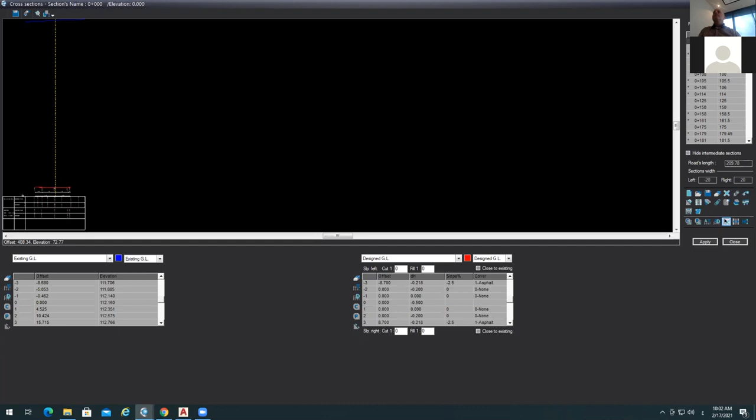Yeah, okay, you are working with DH. It's okay. Go to the vertical alignment and see what's going on. Close this and go to the vertical alignment. Yeah.

Where's your design? I made the design by cross sections, right? No, first of all you design the profile, and then you design the cross section using the template. Oh yeah, I should. Okay. There's no profile here, there's nothing. Yeah, okay, I know the problem. Thank you, okay, that's no problem.

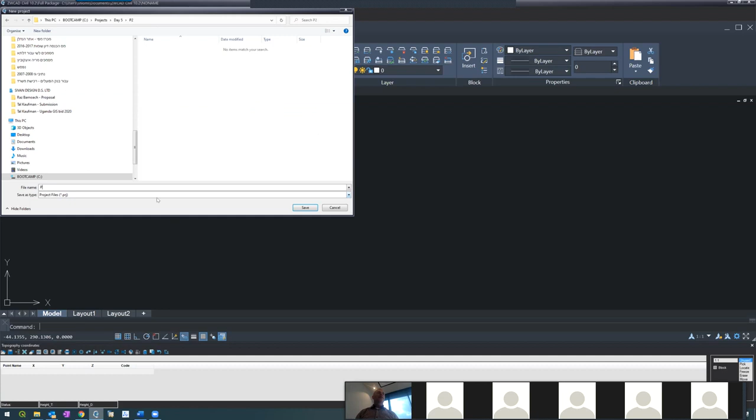File, new project. No, I will go to documents and go to - sorry, I'll put it in my C. In projects, I open a folder named day 5. I will open another, I'll call it practice 2, and the name of the project, P2, like we did in the first place. I started a new project.

The next thing, load the coordinates file. I'm loading a coordinates file for my samples. I go to the documents - all of you have it. I'll go to ZWCAD, samples, bridge, junction, and design. Looking for the TCO - TCO is the topography coordinates file, it's a TXT file, you can see it here. And I will refresh.

And we'll see the coordinates. Now, next thing, topography contours. I will use 0.25. Maximum interpolation length, not so important. I will do 100 and apply.

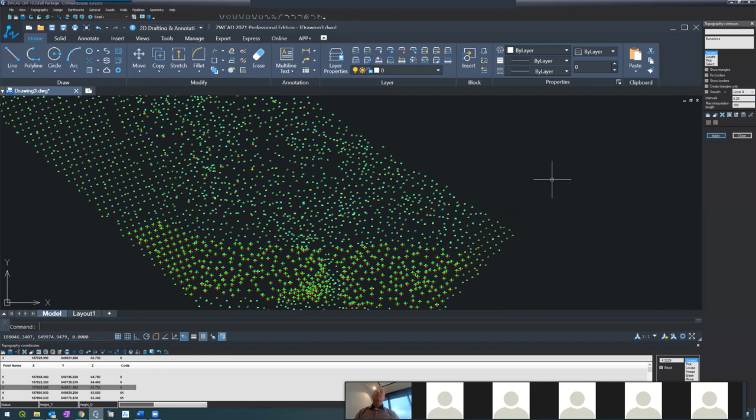Okay, fine, we are good. Good to go. Here it is.

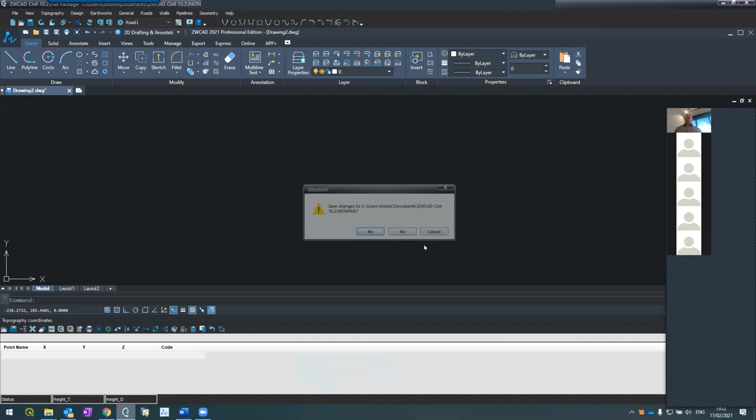Okay, so I started with a project which I did. I called it P2, and I've loaded to, I created the surface of the ground level.

Now I can go to the layers. I can take civil, make it like this, and all my topography contours layers, I'll make them dark, so they will be in the background. Good, it's better for me this way.

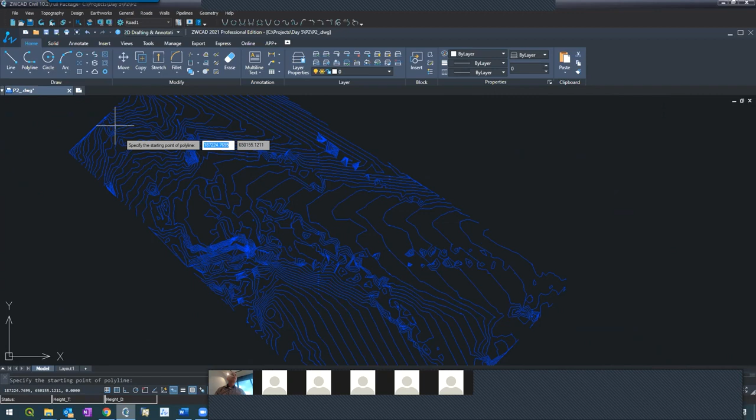Okay, now I want to design my road, so I'll create a polyline that starts somewhere here. Go along this, I don't know what to call it. And here, along this small, it's not even a cliff, I don't know what it is.

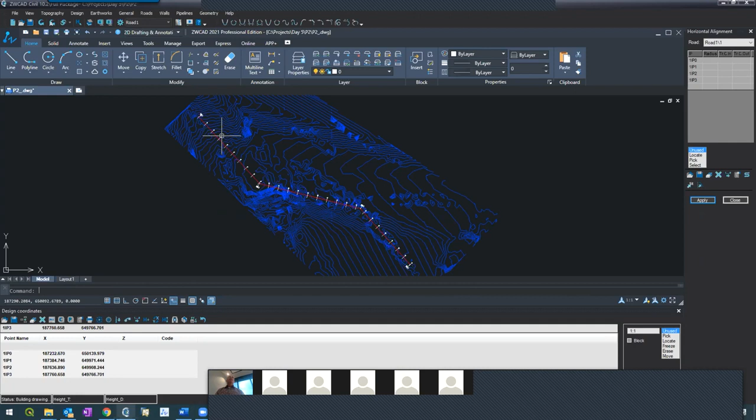Anyhow, roads, horizontal alignment, select, enter, select. Apply, and this is my road, so I will change the appearance to be format 2.

And I will enter a radius here of 300, 500. Right, let's see. Yeah. Okay.

This is what I've designed. Fine, the next step, vertical alignment, applied, and got the existing ground level.

Now I want to show you a trick. If I click here on the right, get ground level at offset, I want to get the ground level at an offset from the center line. I want to know what goes in terms of ground level. Let's say my road will be more or less 10 meters to the left. No, let's say 3.5 plus 1.5, 5. I want to know what's going on 5 meters to the left and 5 meters to the right from my center line. I apply this, and the software will give me how the ground level behaves 5 meters to the left and right from the center line.

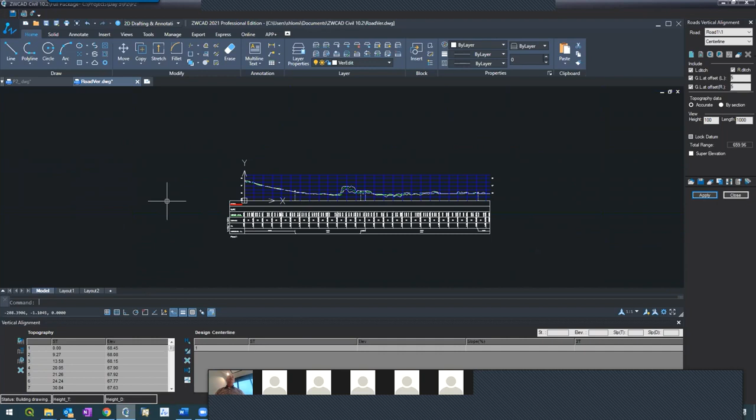I hope you understand. So from the center line, let's see. I told it, go 5 meters to the right, 5 meters to the left, and also give me the ground level, especially here where we see the change. So again, if I go to the vertical alignment, this is what I'm seeing here. Good.

Okay, this is my profile. Now I'll continue with my designs. So what I'm gonna do, 1 minute, I'm trying to minimize this.

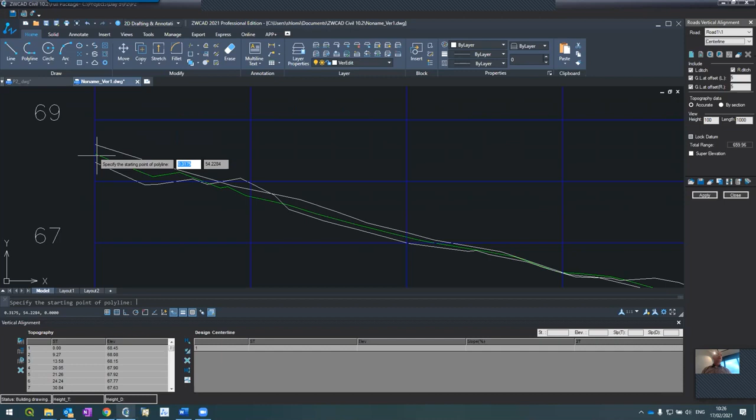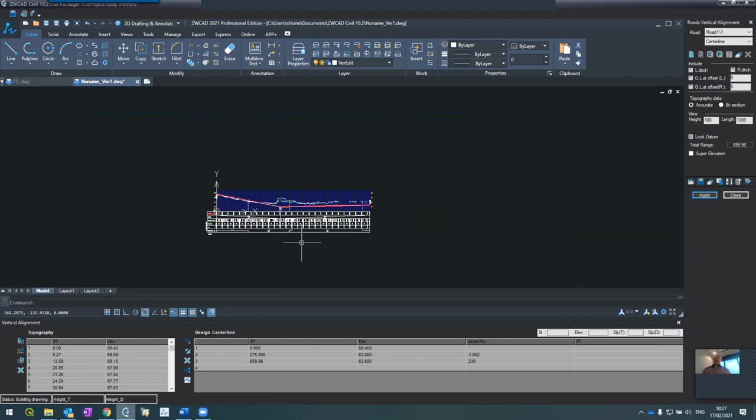Okay, what I'm gonna do now is making my design. I will start with the ground level, polyline from, let's say, here. And here, I want to cut a little bit. This is 1 meter each one, so 2, let's say, like this, 3 meters. And from here, like this. Okay, so this is my design. Here I'll enter 275 meters.

Excellent, any questions so far? I think we know already this one, but if you have any question, this is the time. Anything about the things that I've shown? Nothing. All clear, Majid, is it okay?

Majid, can you follow? Yes, it's okay, it's okay. What about the rest? Gal, everything is clear? Yes, okay.

I want to continue, all right. So this is what I've done. I will now go. Sorry, okay, apply. There's no need to apply it all because there are no cross sections.

I'll go to the roads cross sections, and I'll use the same trick, define sections, 25 meter, get the sections.

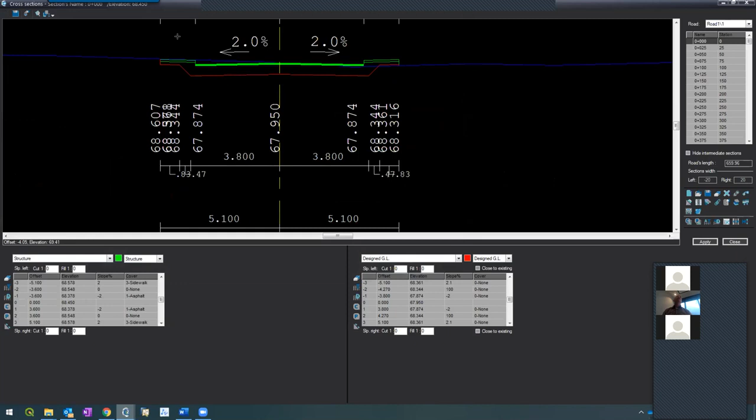Copy it, go to the last section, paste, apply. Interpolate, all design. Fine, I have all my sections.

Ah, okay, it's my mistake. I'm not using DH. DH, this is what was missing. Let me clear again. The problem I had was not using DH, so I'm clearing the sections. Very important that in the options you'll use DH, not elevation.

Now I'm going to the first section, read the template. Okay, now it makes more sense to me. Go to the last, paste, and interpolate.

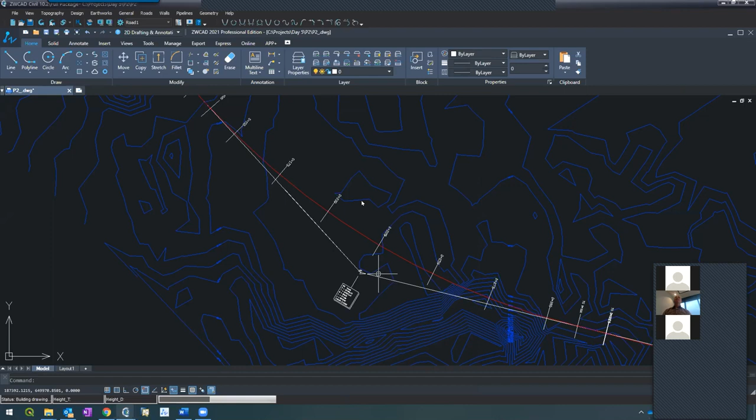We know that here we are cutting. Remember the profile. And I will create the layout. I want to see the contours, the distance.

Here there's a cut of 2 meters. 2 meters. 1 point something meter, it's okay, it's fine by me. Okay, so this is my profile, this is my layout.

What I want you to do is go to the practice I sent you, and all of you come to the same situation like I did. I want you to design your road using the practice and reach that level. Take 10 minutes, if you have questions let me know. In 10 minutes we will continue with defining a drainage pipeline along this road. Meanwhile, practice this one.

One more thing for your practice, let me just finish super elevation. I'm pressing here, super elevation. This is, let's say, 70 kilometers per hour. The lane is 3.8 meters, I see, and the side slope is 2%, okay?

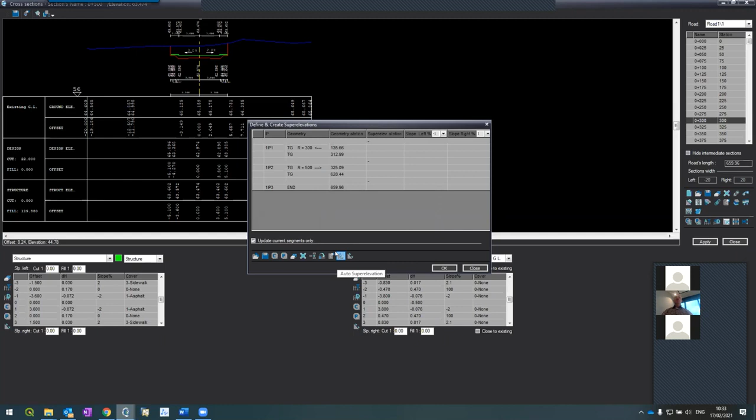He said he cannot do the super elevation because these two are too close. Let's make it 50. Transition is too close. The sector says the transition between here and here is too close, it cannot create super elevation. See, the transition is very close actually.

Okay, now we'll see. This is the transition. You know what I'll do? I'll go to the horizontal alignment and use this move here to take this IP and move it from here to here, say here. Let's apply.

Okay, now I've created an overlap on the IPs. So let me take this to be 300 meters for this curve. Now I don't think we will have problems. Let's see, okay, the transition is, the TG is here, yes, about 100 meters between them.

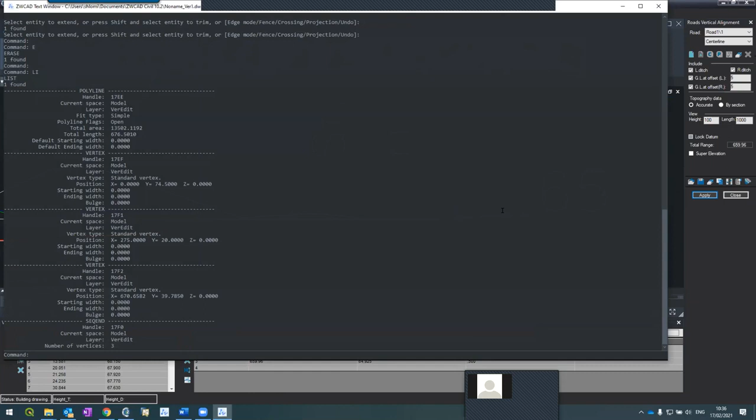This, VerEdit. Ah okay, now it's corrected. No, still on the back. You know what, I'll do it in the table here. The total length is 676. Ah okay, no, sorry, the existing end here. The total range 659, okay, no it's okay.

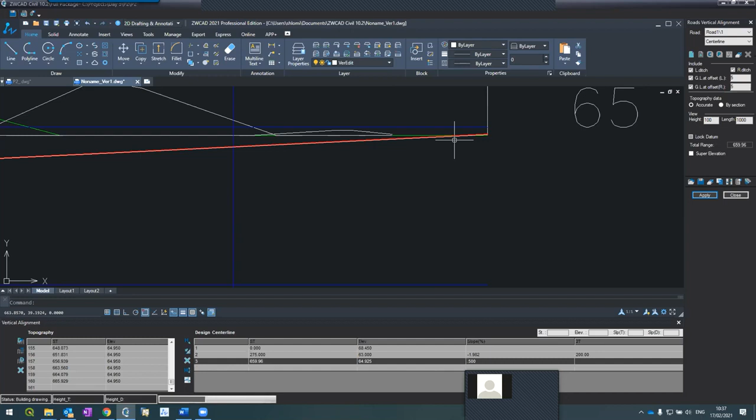What I did is designing too much. Let me change it a little bit. Ah, yeah, it's 665, so I change it to be 665.299. I see the ground level and go again at the same slope, 0.5. Let's see if it's working. Yeah, now it's okay, that's what I wanted to do.

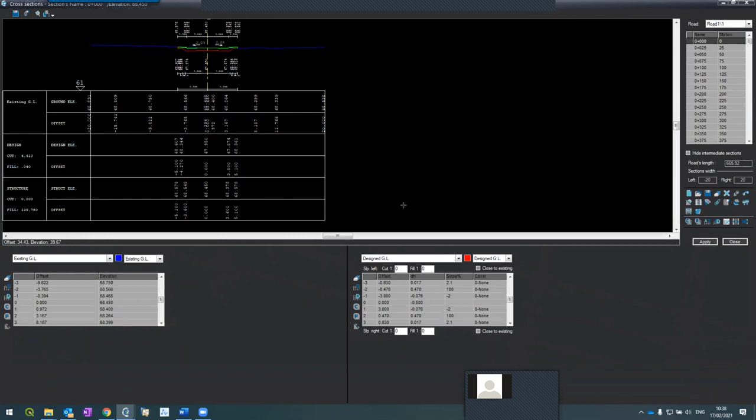And I'll apply, update all, so all my cross sections will be rebuilt. Go to the cross sections, let's have a look. Yeah, everything was rebuilt. I can update the layout.

So what I'm asking all of you is to design a road similar to what I did, like this. And when you finish, create super elevations here. I'm using automatic 70, yeah, like this.

No, distance too small again. So let's make it, okay, now it's okay. The speed is lower, it's okay. Now, let's see the super elevation. Okay, we see it here.

Great, so all of you take 10 minutes and do the same. I'm waiting for you. You have the practice? Anyone doesn't have a practice? Is anyone missing the practice? No, okay, I sent it by mail so all of you are supposed to have it.

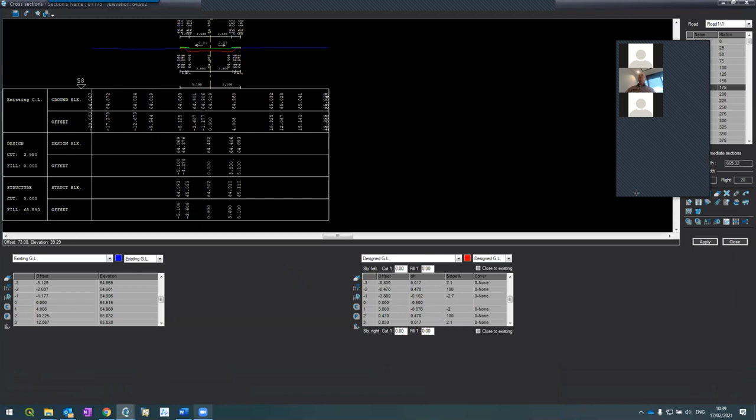Okay, take your time to practice, 10 minutes, get to the same position where I've been, and ensure you have a road similar to this one. I'm waiting, I'm here. Take exactly 10 minutes so we can continue and try to build something similar to this one.

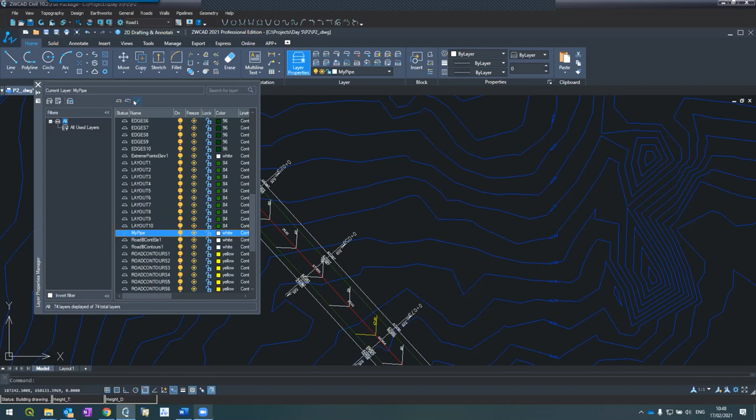The first stage is to open a new layer, and this layer I will call pipe - it can be any name. Let me change it to 'my pipe.' I will make it the current layer and give it a color, something like this.

And what I'll do to the road itself, I'll make it somehow this color. Also to the contours of the road, I will make them this color.

Okay, now I'm designing my pipeline. So the first manhole starts somewhere in the road here. Continue, let's say - actually I can go 50 meters, let's say 50 meters to this direction. 50 meters, and another 50 meters.

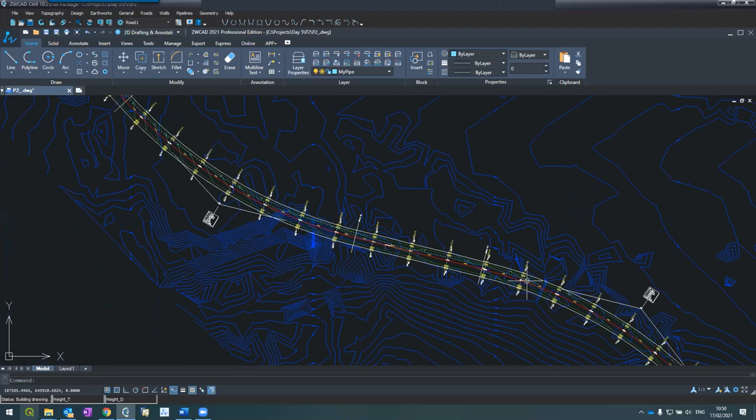This 50 meters, another 50 meters, and another one, like here, here, here, here, all along my road. You know what, I think it's enough. So this is my pipe.

This is my pipe. I'm going to the pipelines list. The first thing I'm doing on the right is defining the units. Again, pipelines list - I want to define the units. So for drainage I'm using centimeter, I'm changing here drainage to be centimeter.

And I have one pipe, I'll call it pipe 1, and the type is drainage. And the profile is round - I mean the pipe itself is round. So this is the first definition: I defined one pipe, it's a drainage pipe, and the units are in centimeter.

Okay, sorry, my mistake - drainage, round, and units in cm. Good.

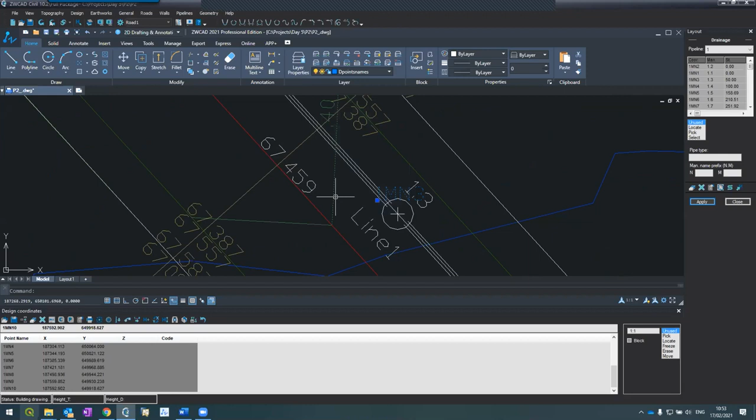It starts here and continues here. This layer is the Dpointsnames, I'll just leave it in the background like this. Okay, so this is line number 1, it starts from here and going along here with my manholes.

Now I know that my manholes - I can scroll here, look to the right, until I get to the pipe diameter and manhole diameter. I'm selecting the entire cells in the pipe diameter and I enter 50 cm - this is my diameter for the pipe. The manhole diameter, it's not a diameter, let me start from the top. I'm collecting, but since I wanted to change it from circular to rectangle, I'm defining 150, 150 - 1.5 meter to 1.5 meter, and it's a concrete pipe.

I'll press apply, here it is. You can see here the pipeline - it became rectangular, 1.5 meter to 1.5 meter. This is 50 cm width, this is the size, this is the manhole, this is the length, and this is the size of the pipe. Any questions so far?

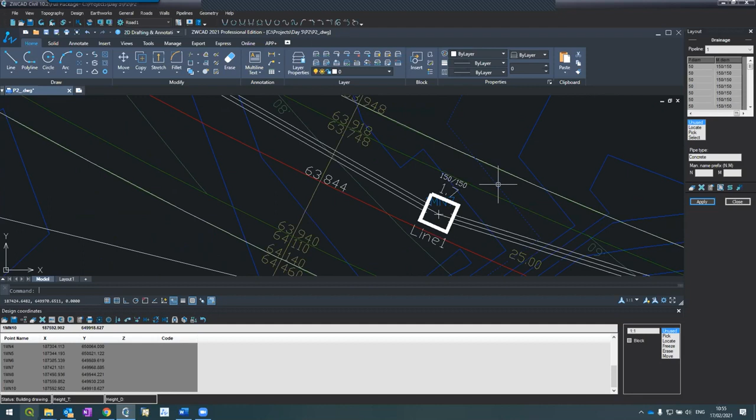Going to pipeline sections, pressing apply, and I'm getting the profile. I'm getting the profile.

I'm getting the profile. I'm seeing the ground level, but I don't see the road itself. One second, I think I did a mistake here on the layout. I reselected my polyline. No, it's okay, there's no mistake. It's 50 meter, 100 meter, it's okay. Good.

So what I want to do now is get the road elevation, right? We designed the road. For that, I need to ensure that when I created the road layout, in the horizontal alignment, I marked the triangles. Let me remind you what triangles mean - triangles mean surface. Remember when we discussed the existing ground level, we said we are creating a surface. I'm doing the same here.

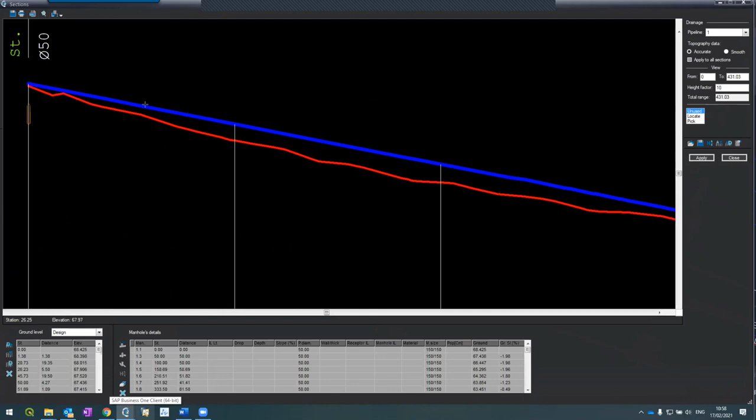The good thing about having a 3D surface of the road is that now when I go to sections again, I will change the ground level here from existing to design, press the Get Design Data button, and press Apply. I will get the elevation of the road surface. This is my designed road along my pipeline. I hope you follow - this is the existing, and this is the road which we designed. And obviously, my drainage pipeline will refer to this.

Let's look at the table. In the table here and below, what I'm having are the list of manholes - manholes 1, 2, 3, 4. There was 1.2 here, I removed it because it was a duplication. 1, 2, 3, 4, 5, 6, 7, and so forth till the 10th manhole which I've created.

I'm seeing the running distance, the distance between the manholes. I see the diameter, which I defined in the horizontal alignment, and I see the manhole size also, which I defined in the layout, not horizontal alignment. I also see the slope of the ground level - it's more or less 2% going here. This is what I can see, it's just an aid, of course.

How to start designing? I'm going to the first manhole and saying, put it 1.5 meters in the ground. So this is my manhole, 1.5 meters in the ground. And I'm telling the software to go by a slope. I'm marking all this - go by a slope because I'm going down, so it's minus 2%, and I'm pressing enter. That's it, the system went by 2% and designed my pipe.

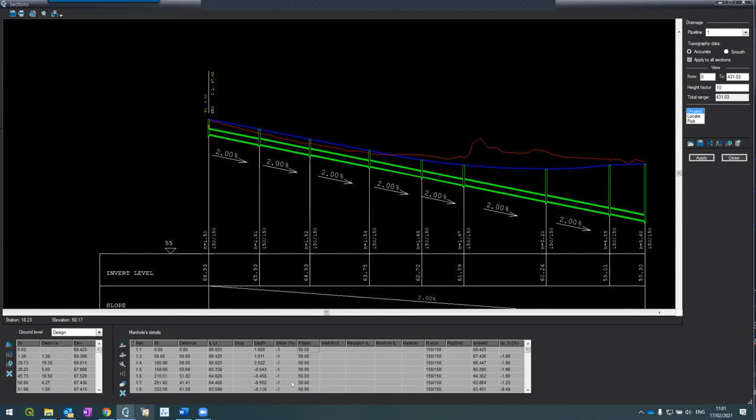Okay, but here I'm cutting, this is 5.6 meters. Let's just see - by the way, all the data here was filled in. Now, if I want to use another system, for example, I want to change the slope to use 1%.

I'm pressing apply and see what happened. At 1%, starting from here, the software marked the exposure. The pipeline is almost exposed, starting from here, going here, it's above the road. So obviously this is not what I want to do in this case. All the red dots or circles show where the exposure starts - the software knows that less than 40 cm, it starts showing exposure.

I can fix it in two ways. I can, for example, come here manually to this section, this manhole, and say there is a drop of 0.5 meter. Automatically it created a drop of 0.5, and I create here another drop of 0.5. Here, okay, almost fixed the problem. I can continue this way. Another method is...

...to tell the software to do it automatically. I'm using auto design. I want to go by this minus 1%. I want the software to keep the cover of the pipeline with a minimum of 40 cm - what I would even make it 60 cm. And I want the software to use fixed slope. It means the software will go by this fixed minus 1%, and whenever the exposure reaches 60 cm, automatically the software will create a drop.

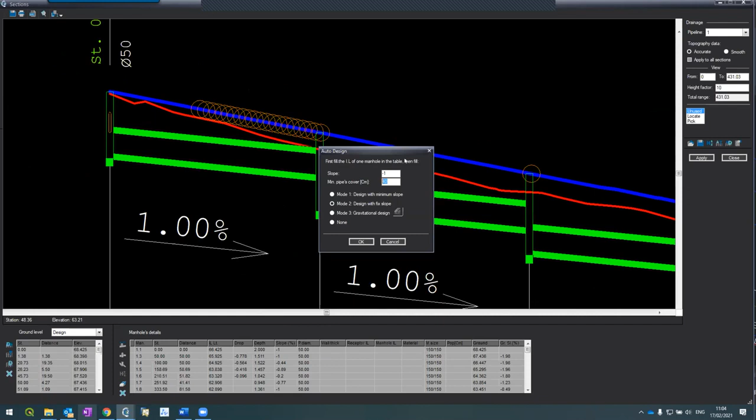I can start my design not at 1.5 meter, let's say 2 meter. Design with minus 1, fixed exposure of 80 cm, and apply. Okay, I'm almost good. There's a small problem here on the manholes in terms of exposure, but generally I'm good to go.

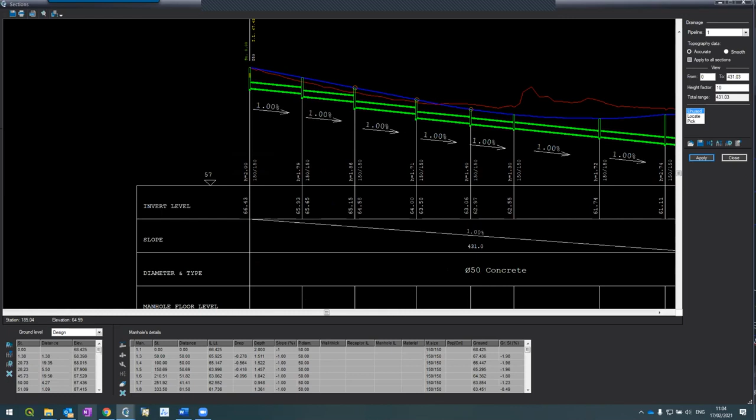Any questions on what you just saw? Anything? Nothing. No questions. Any questions? Is that clear what I showed?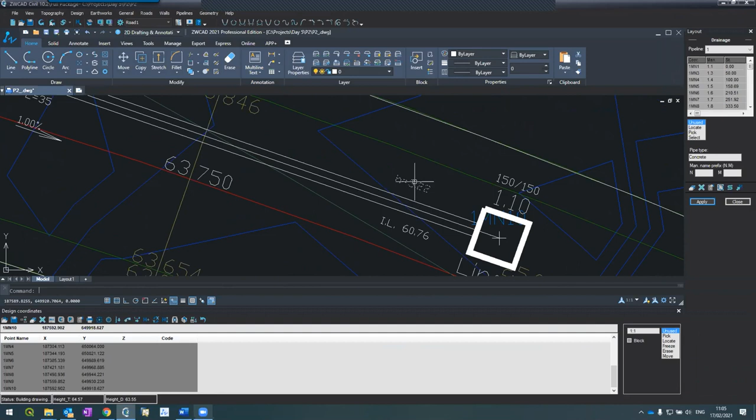Okay, I press close, go to the layout, press apply. Now all the data of the manholes appears: invert level, depth of the manhole, size of the manhole, number of the manhole, and so on and so forth.

If you have questions, this is the time. No questions. No questions.

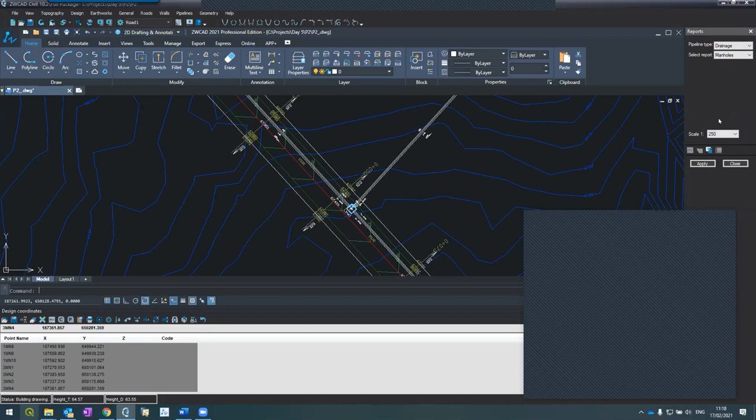So I created two pipelines. If I go to pipelines, quantities, reports, I can create reports. So we know it's a drainage. First, I want to create a manhole report. If I press apply, I'm getting a manhole report with the manhole data, the dimension of each manhole. Remember that I created the second pipe. The size, the height, the invert level, outlet, left, right, and coordinates.

And coordinates. I can equally take this table and put it here. How did I do it? I clicked here, selected the scale of the text. Let's say that I want to print it at 1 to 250. I click here, go to the drawing, pick the lower left corner, press S in the command line, S for set,

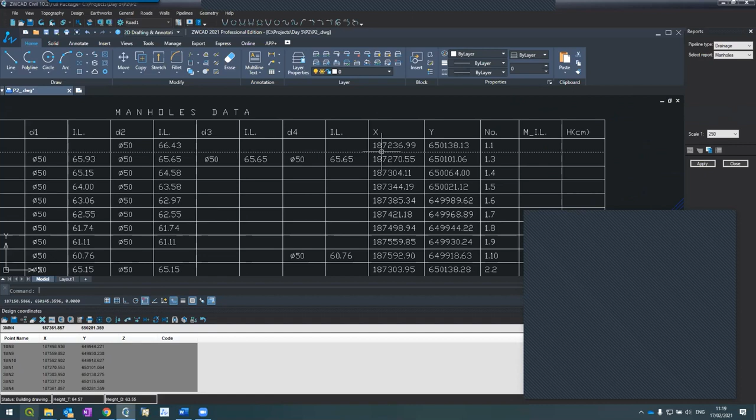and I'll get my table with all the data. Okay. Another report which I can create is quantities. For all the pipes, 1 and 2, I can mark all, press apply, and this is our quantity report. From depth, this and this is the length, and this and this is the length which will be buried, so on and so forth. On the size, I have only one 150 size, and these are the different depths of the manholes which I will have to create.

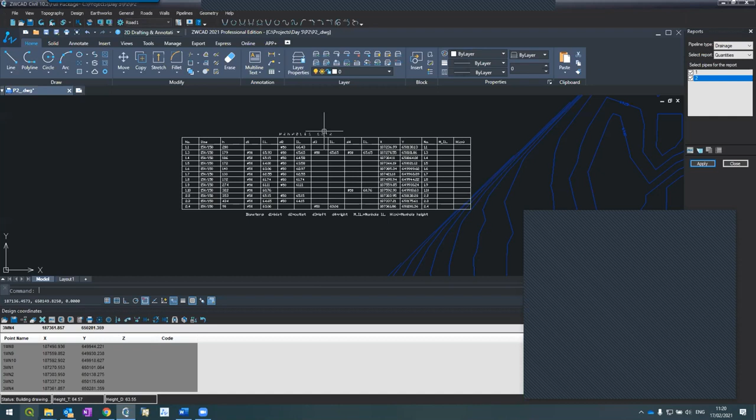Any questions about this one? Any questions about this one? None. Okay.

I finished the drainage design. So by your permission, I'm going to the next matter. The next matter is retaining walls.

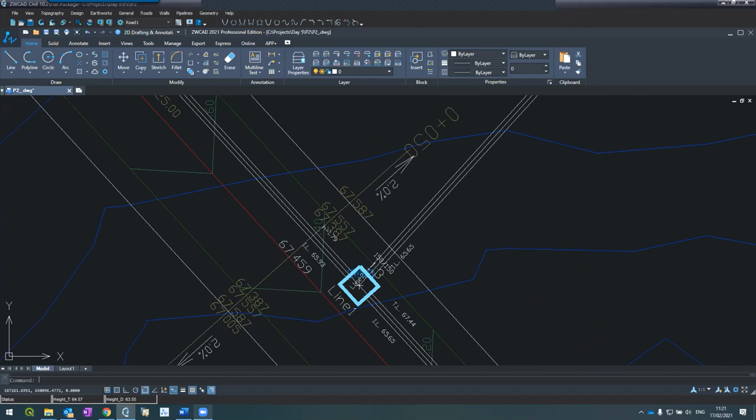Before I'm leaving the drainage design, do you have any questions? Do you have any questions? None. It's all clear? You know, if I don't hear you, I don't know if you understand or don't understand anything. Mr. Adamo, do you understand? Is everything okay? Mr. Adamo? Hello? Oh, cannot hear you, Mr. Adamo.

Okay, I'll continue. So we created drainage pipelines. Now what I want to do is create a retaining wall. For that, first of all, I will go to the vertical alignment. Remember, this is my vertical alignment. So obviously I don't need anything here, but here I'm...

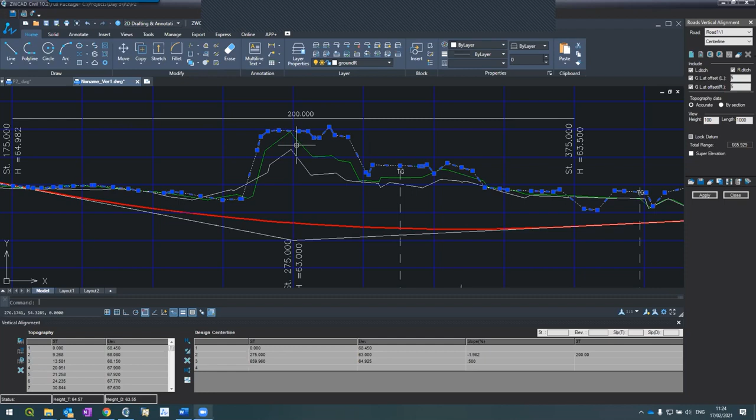How do I do it? So again, my challenge, yes, who asked what? Yeah, Adam.

My challenge is how to create a retaining wall when I'm going into 3 meter depth cutting, which is probably here. Section 275. Let's see.

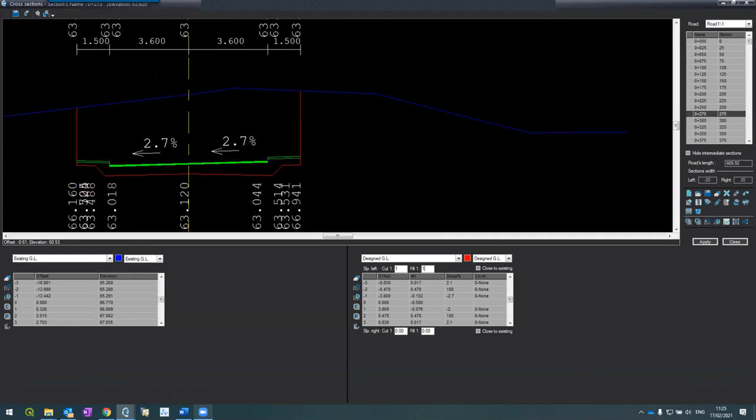Go to 275. Here I want to create a retaining wall, maybe also here, I don't know. Let's say on the left, I will define a slope of 1 to 1, because I can, also on the structure. But on the right, I want to create a retaining wall.

Okay, so let me take this one-on-one. I enter one-on-one structure, right click, send to all. Right click here, send to all, also here in the design. Good, and interpolate, so all the thing will be refreshed.

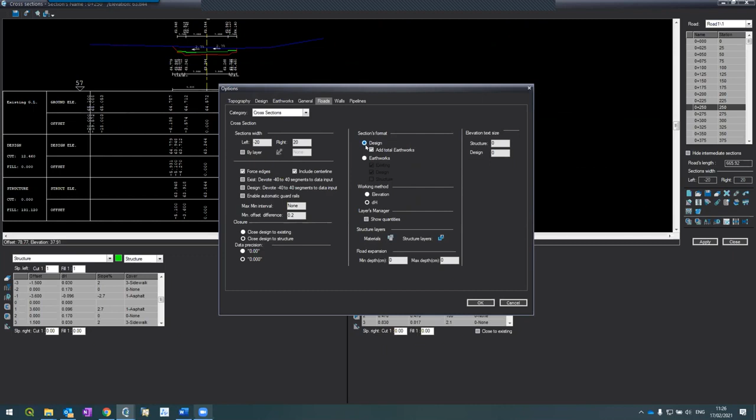So somewhere from here, around here, I will need a retaining wall on the right. By the way, to remove this in the table, I will go to options and say don't show the add total earthworks, I don't want to see it. So it will be something like that.

The display, all right. Now I'll go to walls and I will go to the walls list.

I'll tell myself I'm creating one wall, I'll call it wall 1. I can call it wall 1 for road 1, wall 1, R1. It's a name, and I want to attach it to the road 1.

If I have several roads, I can attach to different roads, and it's on the right side of the road, here. So again, the name, to which road it's attached, and the side.

I'm going into horizontal alignment. I can draw my polyline of the road, or I can tell the software, since I know that the wall should retain in this side, and we know the distance from here to here.

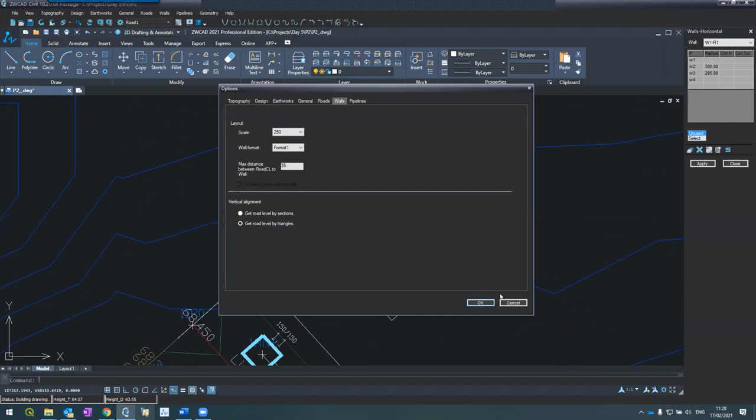Okay, so this is the wall. It starts here, all along on this right side. I'm going into the vertical alignment of the wall.

Pressing apply, I got the existing ground level along the alignment of the wall. I want to see, so this is the ground level, but I want to see the road level. I'm changing here into road level, pressing the button and getting the road level.

Okay, I got something weird here. It took the road level, but not accurate. It's something that sometimes we see. I know because I know the road was deeper here, a few meters, 2 meters or something.

So for that, I need to go to the wall's horizontal alignment, go to options, and tell the software to take the vertical alignment, the road data from sections. Let's go back to the vertical alignment.

But again, this is the road and the horizontal alignment, elevation, sorry. The road and horizontal alignment along the wall here on the right side, not in the center.

Okay, now I want to define the wall. I'm using this, we call it init options. I'm pressing here and telling the software I have 2 types of walls, wall in fill and wall in cut. In this case, in fill, I don't want a wall, only in cut.

Excuse me sir, you're too fast. Too fast, please. Huh? Too fast. Please. Okay, let me repeat.

Okay. Let me remind you what I did. First of all, I went into the walls, went to the walls list.

In the walls list on the right, I defined the name of the wall. I call it wall 1 on road number 1. You can change the name, whatever you want. So it's wall number 1, this is the name, and it's attached to road number 1. It's my decision, I can change it to whatever I want. Then he asked me to which road this wall is attached, and I said road 1, and which side - the right side. So this was the first thing I did, and I pressed OK.

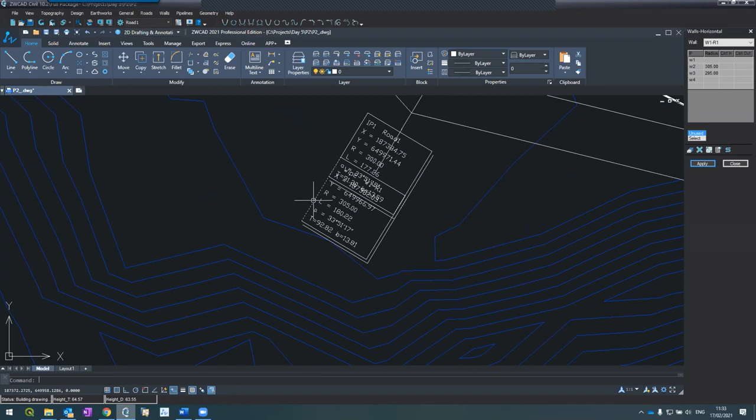And I got this thick pipeline, a thick line of the wall with its data. See, there are 2 data sets here, one of the road and one of the wall. This is wall data - to differentiate it, let's make it yellow. Okay, so this is the wall. If you want, also this is wall CL1, let's make it yellow as well. I hope you can see, Rose, is it okay now? For now, yes, yes. Okay sir.

Carry on. This is wall 1, R1, right? And this is the wall. Then I went into vertical alignment.

Before I went here, you remember I told you to get the road in the wall's horizontal alignment, I have to go to the options and change here to get road level by sections. What does it mean? There are 2 methods that the software can take the road elevation. It can take it from the triangle, from the surface, like I did for the drainage. Somehow when I tried to do it here, it didn't work. Usually it happens when the wall is on the side and the triangle is at the edge, so there's no intersection. To resolve this, I use a different system: I'm telling the software to take the road level not from the surface, not from the triangles, but from the sections - go to the sections, go to the right side of the section where you intersect with the wall, and from here get the elevation of the road. It's 2 methods - if one doesn't work, you can use the other.

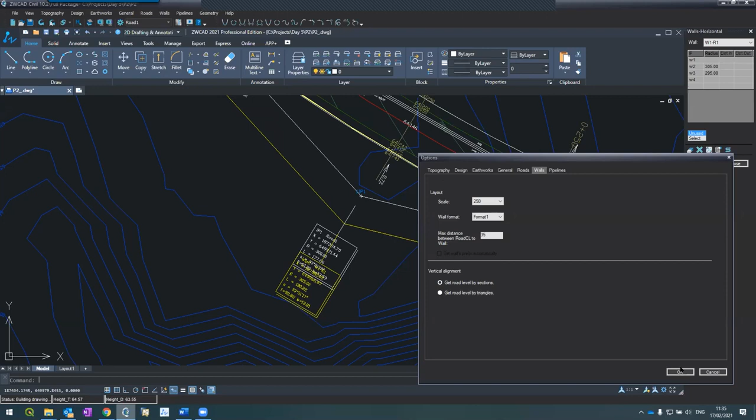Then I went into the vertical alignment of the wall. I pressed apply, so immediately I got the ground level, obviously the ground level along the wall. I change here from existing to road level and press the button to get the road level data. It asked me, okay, which table - road level. Then all the road level data was extracted into this table. So when I press apply, I will see it.

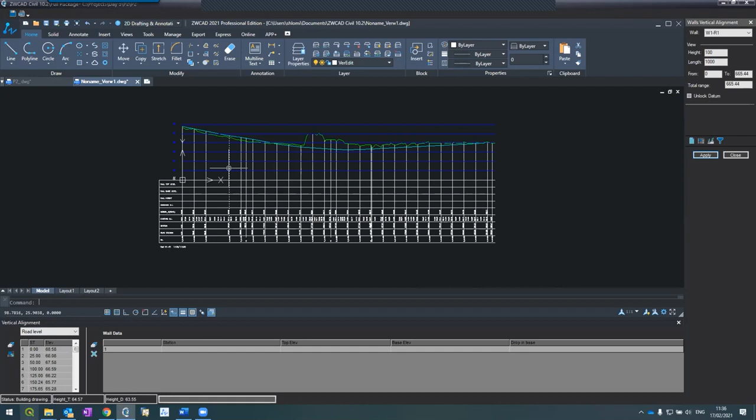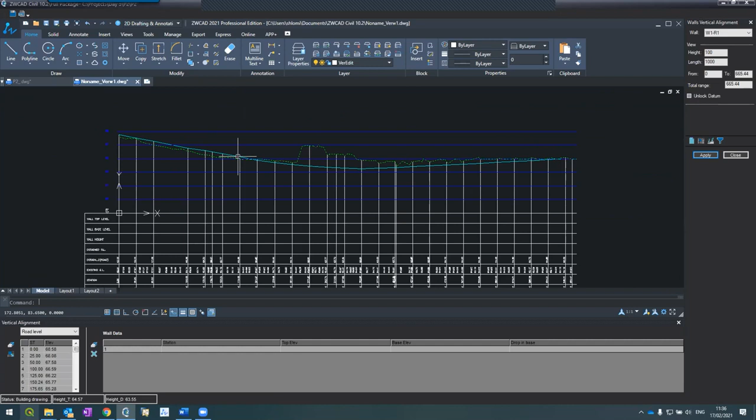So actually here I have 2 tables: one is the ground, you can flip to it, which is green, and one is the road, which is - what is it - light blue. I hope now it's better, Rose. Yes sir, okay, yes sir.

Now I want to define the road, the wall itself, because there's no wall yet - it's just ground and road. I'm going to click the init button, and the software asks me what kind of wall do you want to create. I'm telling the software the definition: I have 2 types of walls, one for fill and one for cut. When I'm filling, I'm supporting the road. When I'm cutting, I'm supporting the ground.

Let me explain. This is fill: here, this is the road, this is the ground. So if I'm creating a retaining wall here, I'm supporting the side of the road. In cut, you see, this is the ground, this is the road - so this is cut. Here, the wall will support the ground from falling into the road.

In this case, I decided to put walls only in cut. So the software asked me what are the definitions of the wall - do you want a wall all along the road? Of course not. So I'm saying only if the height between the ground and the road is above 1.5 meters, you build a wall. If it's below 1.5 meters, you don't build a wall - you know, I can support it without one. Or I can do 1 meter if you like.

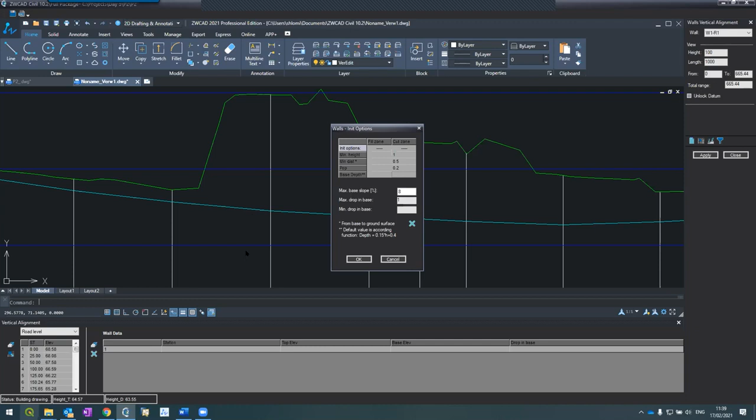How deep would be the base? There are two ways of calculating the base. One is something they call minimum distance, but let's forget about it, this is the depth. By default, the system shows you, if you don't touch it, the system will take 15%, 0.15, multiplied by the height of the wall, add 40 cm, and this will be the depth of the base. Let's have a look.

This is the decision. From here, I'm above the init. Init was how much? 1 meter. In this area, from here, I'm above 1 meter, you can see it. Here I'm below 1 meter, so from here it starts. From here to here, it's 1 meter.

So from here, there's a wall. It pops up 20 cm above the ground, and the base of it goes 40 cm plus 15% of the wall height, and this is the base which I'm getting. So this is my wall, and all the data of the wall you'll see here: the top, the base, the height, and so on.

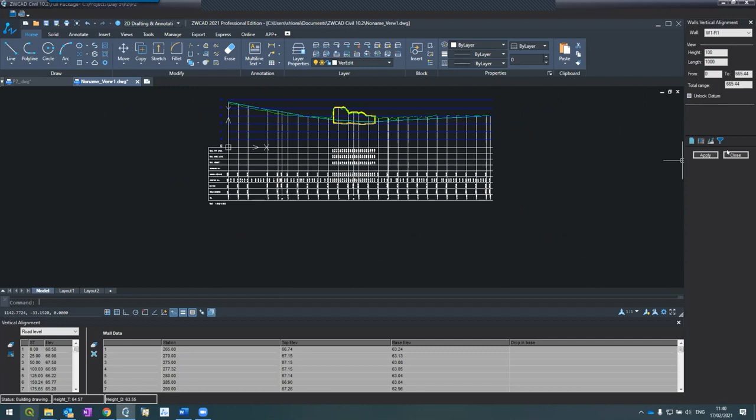Now I want to project it onto the cross sections. But to project it on the cross section, I want to give a full dimension of the wall, otherwise it will not work. So if I go to dimensions, I get a scheme of the wall.

So there are two types of wall. We talked about it. One which is supporting the road when the road is in fill - you see, this is the existing ground level, this is the road, the road is in fill. On this side is the opposite, the road is in cut. Actually, I can ignore this because I decided not to create walls in the fill area, only on the cut area, just to support the ground from falling inside. So this is what I'm looking at.

And I have to define the parameters. What is the width here? A, 20 cm. What is the pop here, if I have any - actually I don't have to use it. What is B? How much it goes inside. So it depends on the wall. I would create what we call a Terramesh wall, 0.5 inside, and outside 0.2, if any.

The base, again, 0.2. It's not important because what I'm going to do is make this slope and this slope 1 to 0. 1 to 0 is straight, like this. This is what I want.

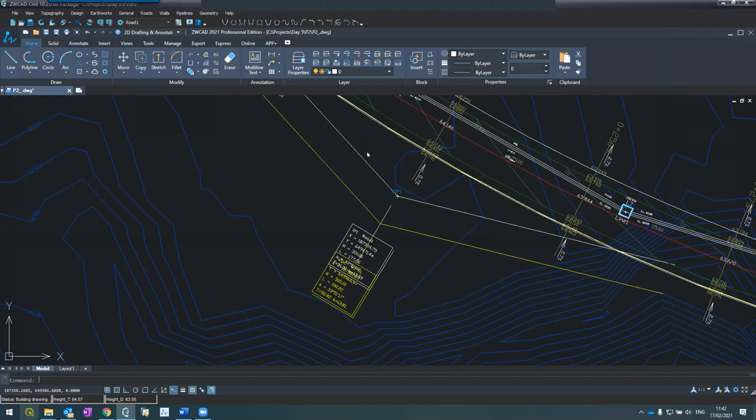If I now go to the cross sections and go here, you see, here is what we saw from 275. The system created a wall with its data appearing on the sections. I have only 1, 2, 3, 4, 5 sections before the rest. The cut is below 1 meter. I hope you got it, I hope it was not too fast for you.

Do you want me to repeat it? Anyone? Please, Majid, just - who asked for it? Yeah, who is talking? Dareen. Yes, Dareen, just repeat how you get it on the cross sections, please.

I didn't do anything, I just put the dimensions. Once there is a dimension, automatically when I go to the cross section, the software projects it inside. Okay, thank you. In fact, I can even update the horizontal alignment, so if I add the slope, the software will fix it.

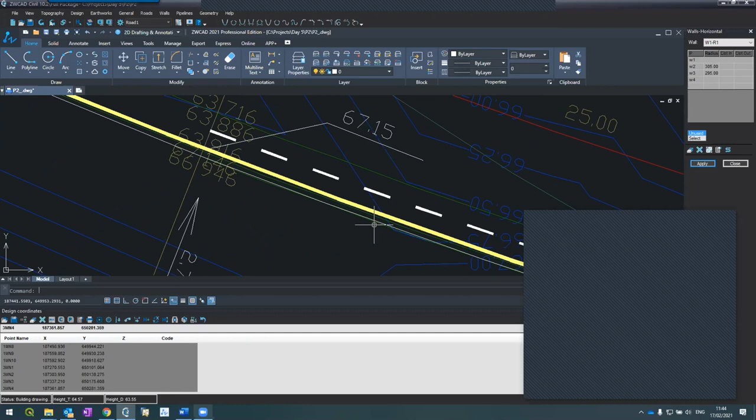Regarding the retaining wall - can you do the detailing, reinforcement detailing? Is it possible? I'm not sure who is talking. Muhammad is talking, Muhammad Abba. What do you mean the reinforcement? I mean, is it possible to design the reinforcement, the detailing for the retaining wall, the detail of the reinforcement?

No, we are not going into the structure of the wall itself. We assume that you are doing it somewhere in a structure analysis software or whatever. Here you have the dimension, okay. You know what you want, and you just do the civil work of the same. Okay, all right, thank you.

Once you know the parameters, then the software will automatically do it. By the way, when I refresh the horizontal alignment, the software shows me where the cut is. You see? All right, thank you. Automatically it marked it like this and gave me the top of the wall.

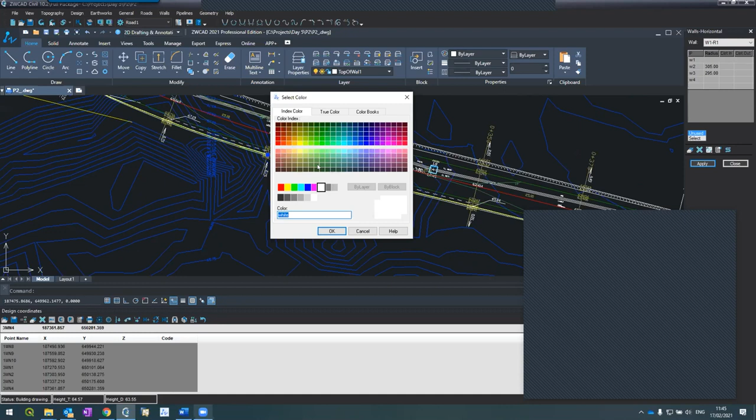Along - yeah, more questions please. Top of wall 1, more questions please. Hello sir, yes please, can we see the pipeline on the cross section?

How? Yes, okay, this is a good question. Yes, you can, you can. So the question was, how do I project the pipeline in the cross sections? Correct? This is the question. Yes sir. Okay, so remember, I have the pipeline here, it's crossing my cross section and I want to project it.

Let's go to 6, for example, 325. If I go to 325, it's here. I don't see the pipe, and I want to see the pipe. I know that on the left side there's a pipe somewhere here. How do I do it?

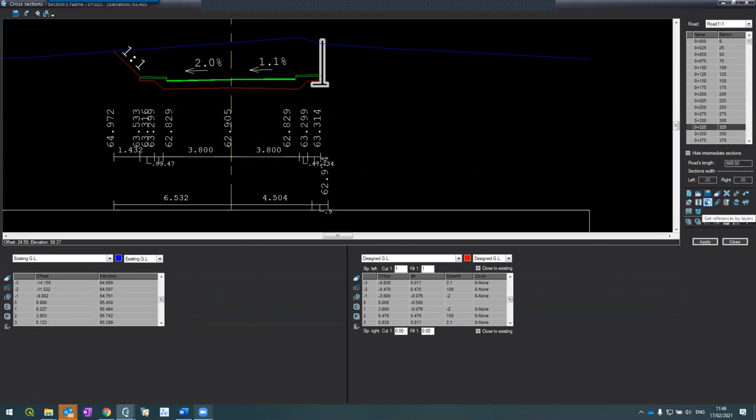I'm pressing this button, get references by layers. He asked me which layer do you want to project? I'm selecting the middle of the pipe, the so-called center line of the pipe, this one. He said drainage layout, I said yes.

Let's see. Here it is. The system automatically took the pipeline, drainage layout, and has given you the pipe. The only problem is that it didn't know how to take the diameter.

So I will go to the reference table. See, it says 0, so I change it to be 50 cm because we know, right? And I right click on the mouse and set 50 cm to all the sections. Let's apply.

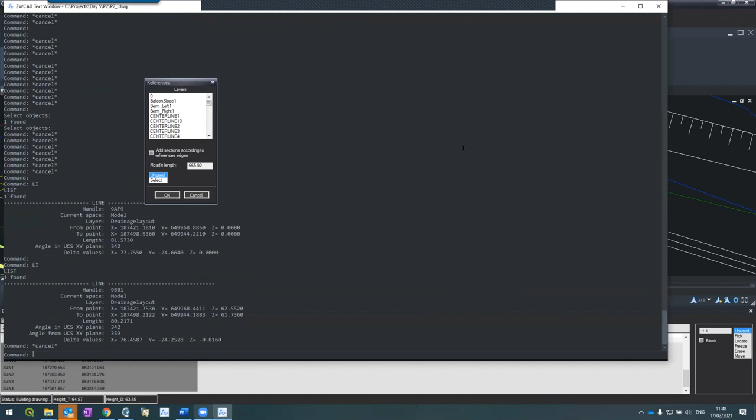Okay, so somehow I didn't select, I wanted to take it from here. Let's see again. Drainage layout. Okay.

No, he didn't, he just cut, he didn't cut the 3D dimension. I don't know why. I can edit manually, but probably this is not what we want. We want this to do automatically. So actually I want this to be 1.5 meter and 50 cm. Okay, this is what I want to see, right? But we want this depth to be automatic.

Didn't create it, I will have to check. Anyhow, the diameter you have to enter manually because it cannot read it. You just enter 50, right click, send to current cell, to all the sections, and that's it. The depth somehow it didn't take - it took 1.5 meter, although it was in 3D, so I don't know. I will have to check what happened.

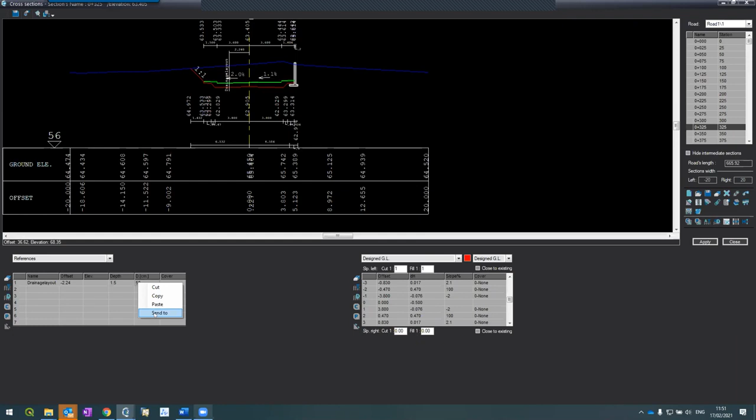Can I ask something that's not in this lecture? Yes, please. If I want to calculate sublayers in the cross sections, like base course 1 and base course 2, then asphalt - how can I get the sublayers on the cross sections? Okay, someone else asked this question, I think on the first day or so.

I will try to do a demo here. Honestly speaking, I've not done it for a long time, so I did not practice for that here, but I can try. Let's try in the first section, maybe here. If I'll go to... you know what, we'll have to do it together. I have to remember how to do it, it was more than half a year since I've done it.

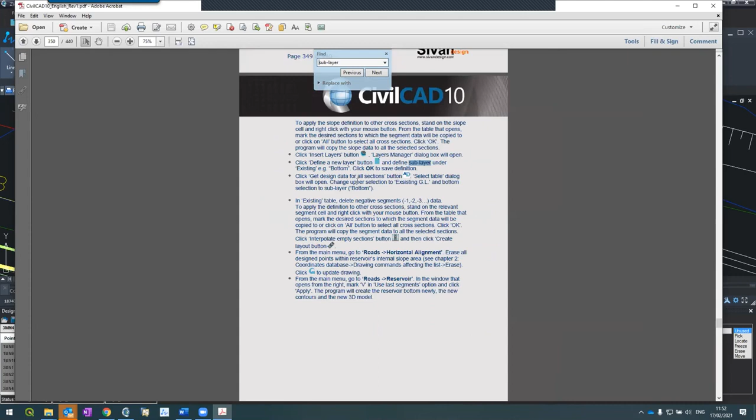Sublayer, sublayer. I can try to do it together. Sublayer, yeah. It's something about sublayer. Okay, yeah, okay, this is the one. Okay, choose on existing, I will try to do it on structure.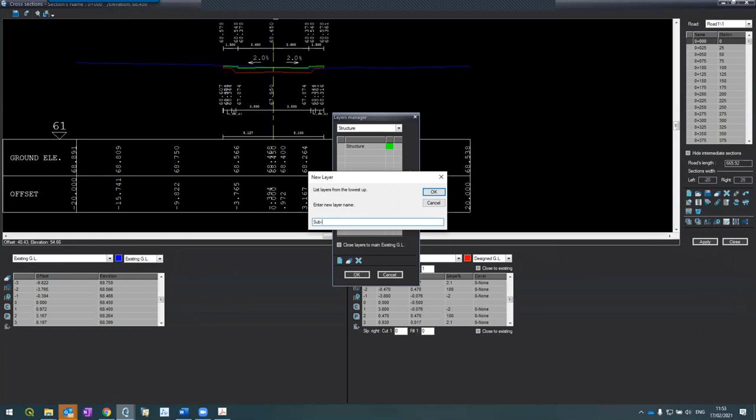I'm pressing the sub layer, insert layers here. I'm changing to structure - these are sub layers of the structure. And I create a new one. Enter a new layer name - let's call it sub base. And I will give it a color, like this.

Now if I'll go to structure, sorry, structure, there's a table here. I can change to sub base. So I'll go to the structure, copy, go to the sub base, paste. And let's say this total thickness is 0.5. So let's say the sub base is 30 cm. So this one will be minus 0.2.

Okay, here it worked. Somehow to the left, what did I do on structure? Let's see, I copied from here, to here. Wait, I'm in the middle. Okay, somehow it created only to the right side. I don't know why.

I'm thinking when you find time, as you promised, to do it and send it to us by our mail. I will try to record a session on that. I will try. Thank you.

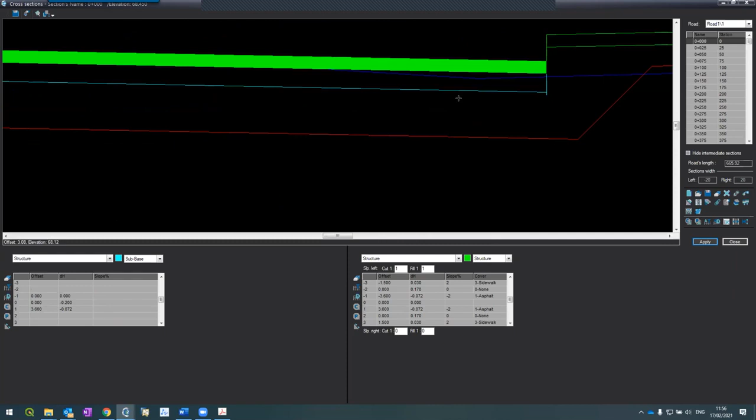You asked me a question, I want to explain something. This is only presentation - there are a lot of tables here. You see all these tables, a lot - guarding rail, a lot of things that we didn't change here, berms. We only talked about the references: the right ditch, the left ditch, the structure, the design, and the existing.

And in the structure, when we created this, it also automatically created sub-layers for each one of it. I can change this to anyone - this is only presentation, you understand? I can just show two tables at a time, but I can pick to put the table on the right or on the left. It's not so important to the software, it's just a presentation thing.

Yeah, I get it. Okay, so the structure - what I did for my ease of use, I put the structure here and I put the structure again, but with the subbase here. So I have one, so I can compare because it didn't work automatically. So I try to understand what's the problem.

But generally, this is the method: in insert layer, define the subbase, the sublayers. Actually I can do it for many - you see, for existing, I can do it for design. I can create different subgrade layers, whatever I want. And for all of it, I can calculate the quantities.

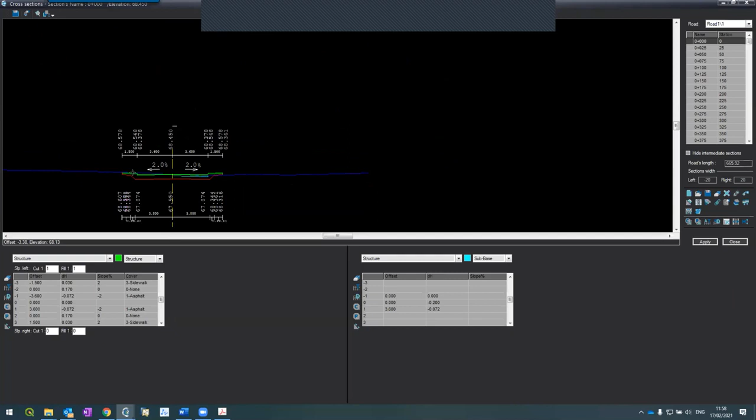Yeah, more questions, please. More questions, please. None. Okay, I want to, before I'm closing - yeah, I got you, Lawal, I read your note.

What I want to say, the only thing that I was planning to show today but I couldn't is the junction. I didn't forget, it's just that unfortunately there is a problem with the junction - it messes up the junction. Sometimes it works, sometimes it doesn't work. We tried to fix it before the training today, it didn't succeed. We created it, so sometimes it works, sometimes it messes up the junction. So I decided not to demonstrate it today.

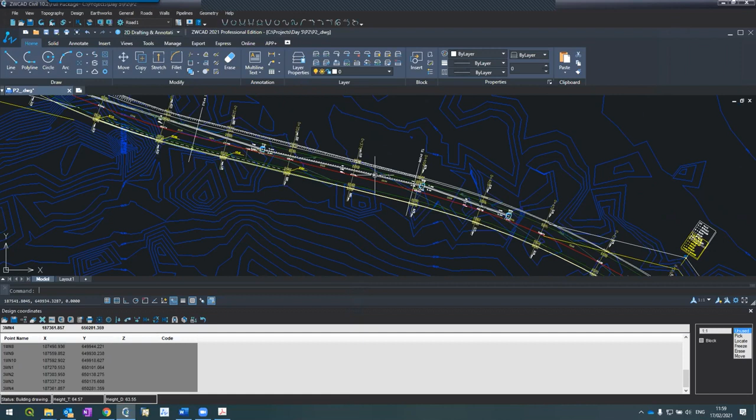I want to also, when it's ready, or we know that it's working perfectly, we will share a video on that.